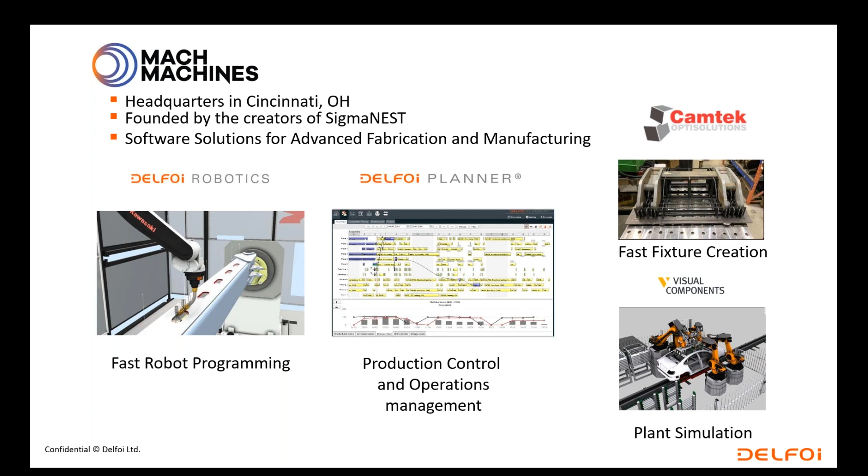They have the easiest to use, world's easiest welding software for robots, and they offer us the planner as well. They also have plant simulation and lean consulting conversations they can have, but they have the most experience in robotics, and you'll see that come out as we talk about our products and services.

Who is Delfoi? They have products for all of the robot applications, but the hardest one, the most challenging, is welding. We have solutions for cutting, finishing, polishing, and painting as well. We have customers that you've heard of, but all that means is there have been people that have recognized that Delfoi can help them do what they need to do. We support most major robot brands. I'm sure there's a couple out there we haven't done yet, but we would love to try.

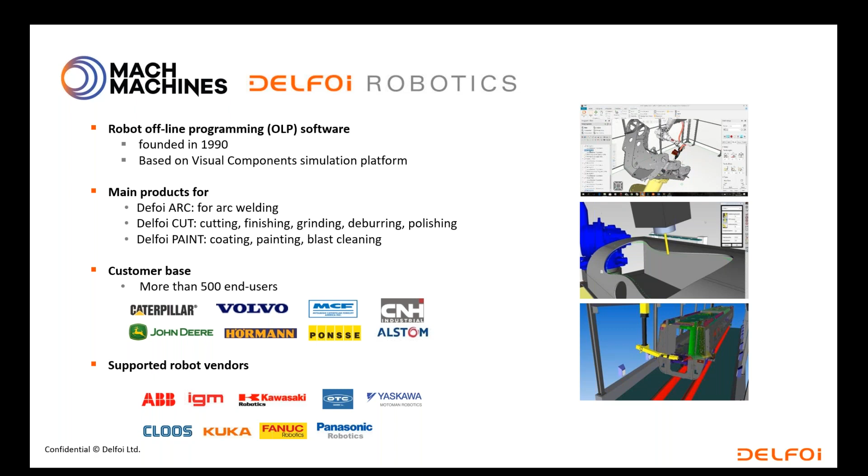Here are a couple questions that we typically ask. Are you still manually welding? And if so, are you hiring more welders? That is a challenge. There's a company here in Alabama that hires 9 welders to keep one. It takes them 6 months and costs $250,000 to get one welder to show up and pass a drug test on the shop floor. It is a challenge to hire more welders.

In addition to having them show up and be competent, robotic welding is a much faster solution. It should be a third or a half the time a manual welder can weld, because there are far fewer air moves. We can get more consistent quality, and robots are available more hours than a human welder can provide. But there are some barriers besides the known barriers of how big is your part.

Other barriers are ones that any robotic application, or any new CNC equipment, would have. The barriers typically come about 6 months after you get a robotic welding cell, and you ask two questions — that's the point of our webinar today. How do I program my robots faster, like my other CNC machines? Your lasers and mills are programmed very quickly, and you can get code out to the cell and press go. Also, how do I make my fixtures faster and cheaper if I'm putting more parts on my welding robot? Those are the questions we hope to answer today.

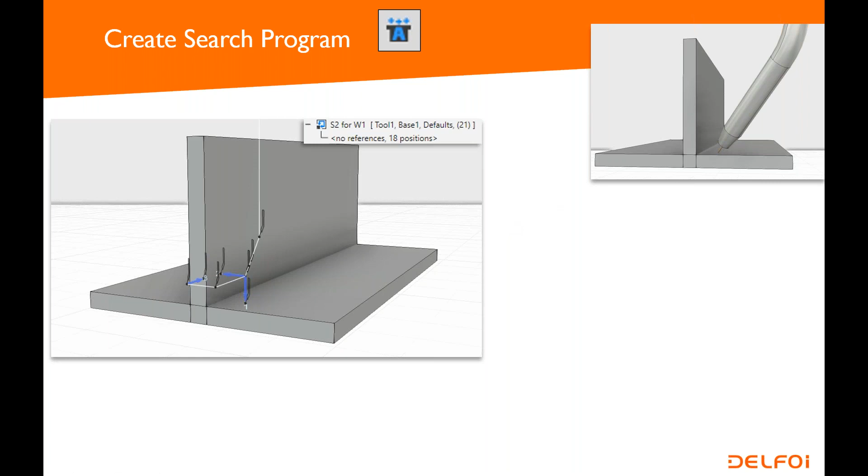The next step in the workflow would be to create a search program. With the search, you have the possibility to compensate for any deviations that might occur due to the position or shape of the workpiece. This is possible by doing either a manual search or auto search, but today we will look at the auto search option as I go through more in the presentation.

So once you have created the weld program, the search program, and your whole program is ready, the next step would be to validate the program. And to do so, we have the path check functionality. With this tool, you can check if there are any issues with respect to reachability, joint limits, singularity, or collisions.

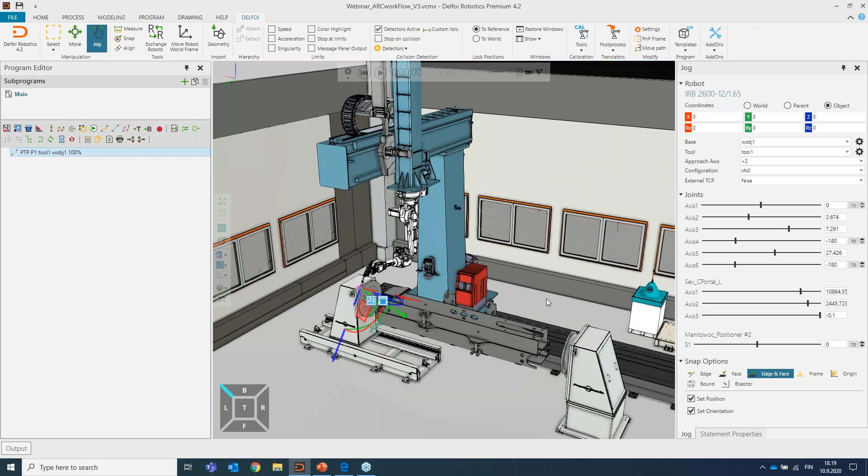So let's begin with the first step here, as we saw, to create the weld path. For this, we have here the create path tool. I click on this, and as I do so, I'm going to get this green picking surface. Now I go closer to where I want to create the weld.

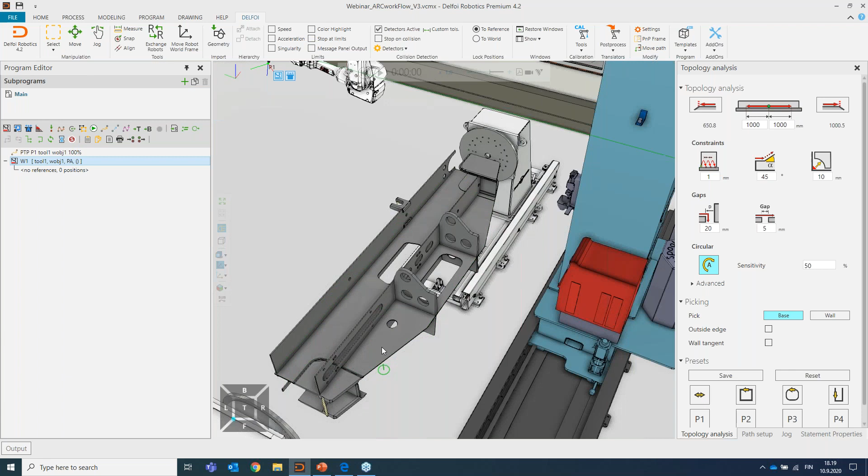Now let's say in this case, I want to create a weld on the seam over here. So I zoom in closer, point my mouse there, and let's see. This looks good, so I will left click the mouse button, and you can see that now the weld is generated. Also you can see that we have here the PA welding position. The software automatically calculates the welding table positions, and you're able to choose it from this window over here. Okay, so that looks good.

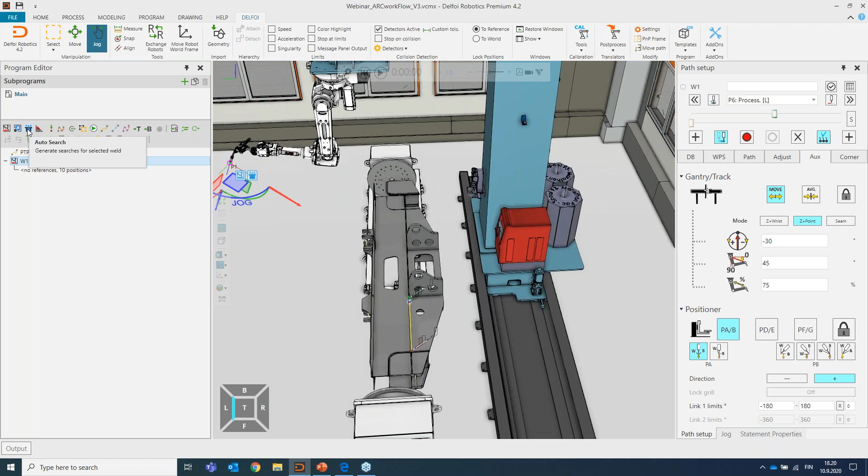Now, once the weld is done, the next step would be to create the search. As I said earlier, you can do a manual search, but in this case, let's see how to do the auto search. Auto search is basically going to automatically generate the search points for you for that particular weld. So now when I click on this weld, I click on the auto search option, and there you go. You can see that we have the search automatically generated by the program.

Let's zoom in a bit closer. And I click the search, and you can see that, okay, we have got a three-dimensional search at the beginning of the weld there.

Okay, good. Another thing is that this is an auto-generated search, but we do have the settings here for this auto search, so you can customize this based on your application. For instance, you can choose whatever your touch sensing type is, if it's a wire, or if you're doing the touch sense with a nozzle, or if you have an external device such as a laser or a camera.

And then of course you can also select that if you want to have a search just at the beginning or in the middle or at the end and so on. You can also change some other parameters, how the search is going to work based on your application.

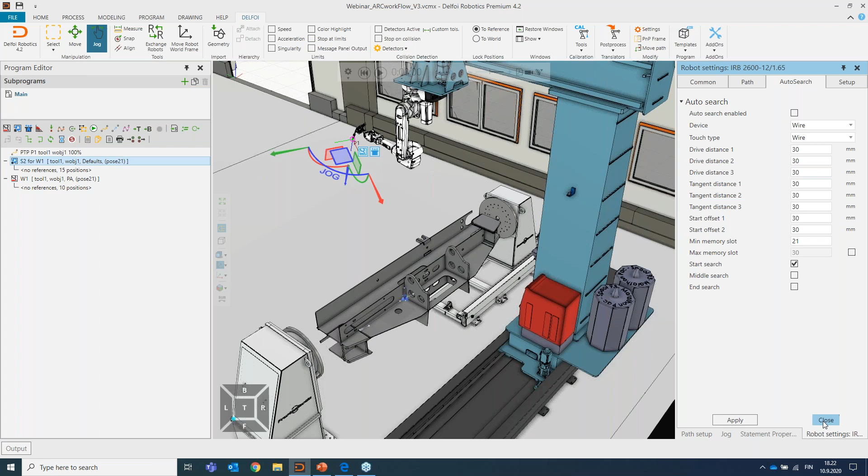Okay, so now that we have the search, weld, and let's say this part of the program is done, the next step in the workflow would be to validate the path. So let's go here and take this path check tool. I click here, and then I can check the whole program or a subroutine or selected statements. Let's check the whole program.

I click on check, and it does the check for the whole program. Then you can see that here we have got this timeline. Let's make it bigger. The program is 99% correct, and we have got some collision issues here.

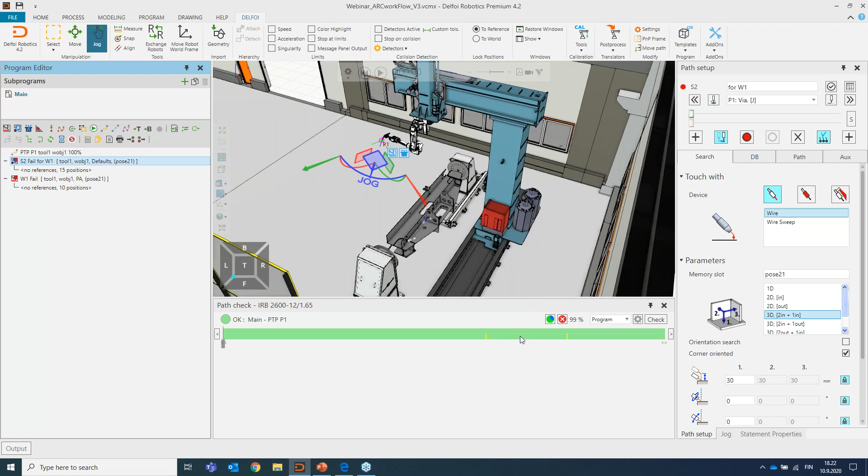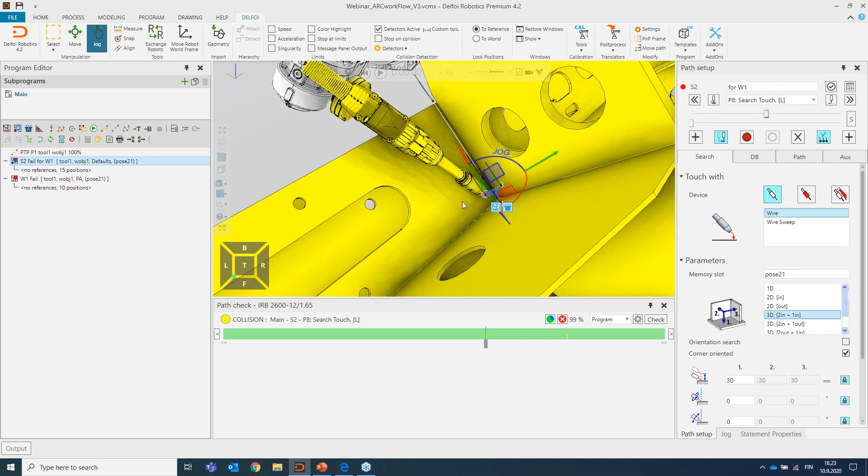So let's go and check those out. I'm going to make the detectors active so that we can see also in the 3D window. Okay, so let's see that the problem is at the search. I activate that, and this is the second point of the search, and there is some collision with the nozzle there. So we can quickly go here and unlock the second touch point, and let's try to get it away. That already looks a bit better.

Let's move on to the next problem point. So I go there. Okay, and let's double click to get the problem point on, and let's zoom in closer. You can see over here again, this is the beginning of the weld, and the nozzle is hitting a bit on the edge because there are walls at the beginning here.

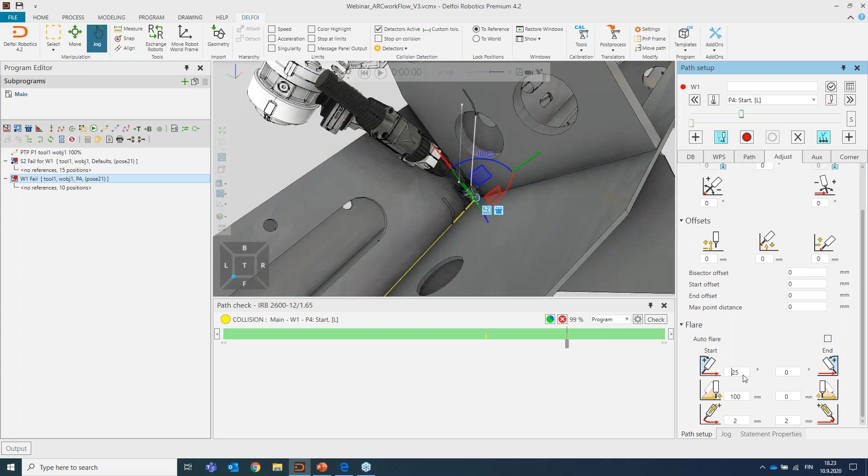So for this, we can try to use the flare option here. You have the flare at the beginning of the weld so that it does not collide with the wall. So that looks good, and let's check the program now.

Okay, there you go. Now you have a 100% correct program. You can also see the status here that it's green and the weld is okay. And what else I can do from this path check tool is...

I can jog this slider here, and you can see that the robot jogs through all the motion paths. This is basically the same way as doing the simulation, but it's quite handy as you can also go back and forth and check the robot motion.

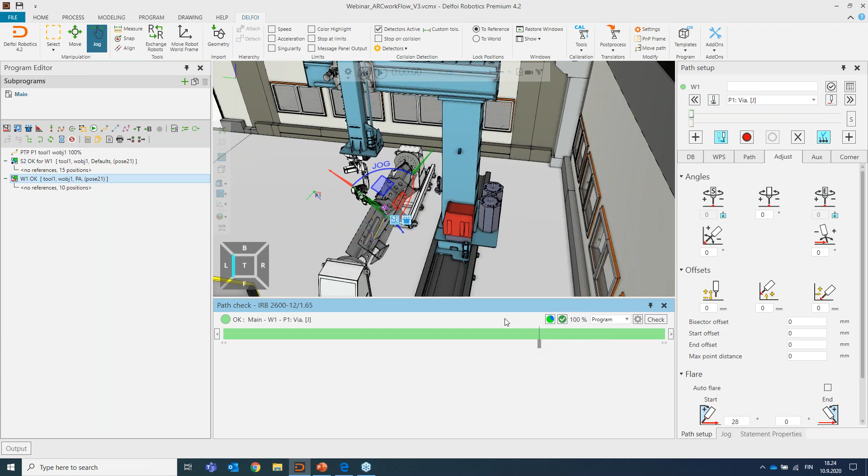Okay, that looks good. One more thing from here is you get the weld report tool. With this report tool, you get the total time of the process, the percentage of the welding time, the percentage of the via time, as well as the weld length.

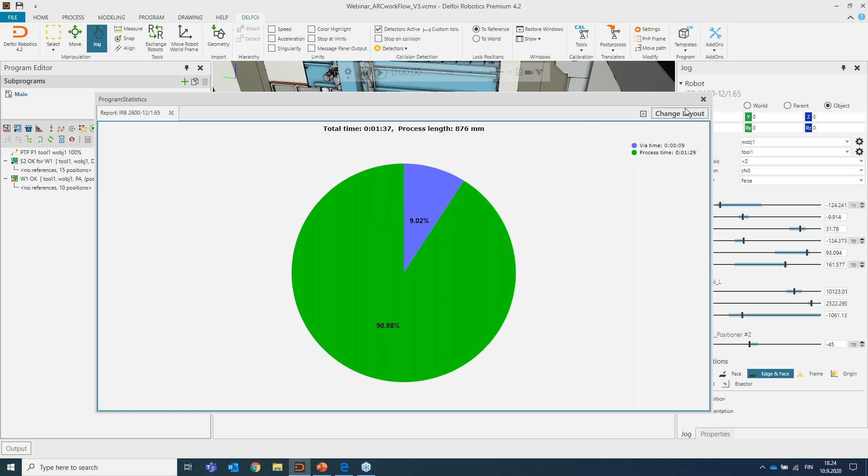Okay, so now the program is good. We have validated it, and the last and final step would be to download the program or post-process it. So we go here. We see that our robot is ABB, so we download the rapid file. Let's download that file.

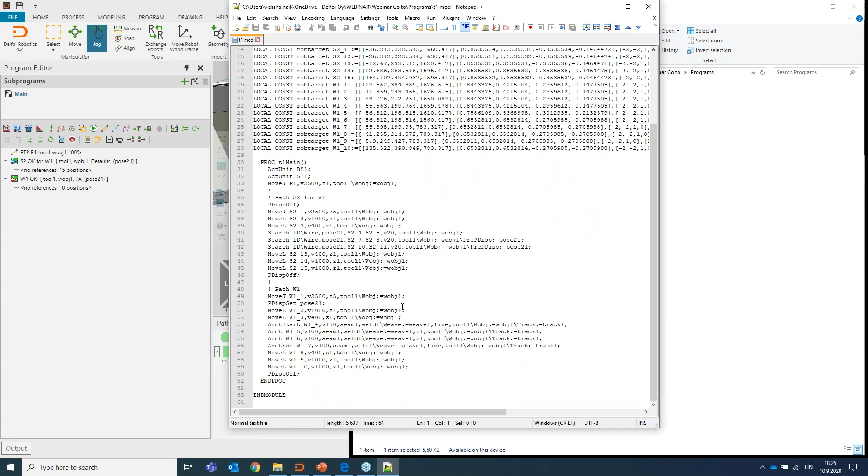Okay, let's see. I'm not going to go through the code, but just to show you that we have the program here ready, and that can be put onto the robot to weld.

Okay, but this was from my side, and I hope that you guys got an overall understanding of the basic workflow that we have here at Delfoi. Thank you for your attention.

Our next speaker here is going to get a little bit more nerdy in the software. We've shown you the basics, it's pretty easy to use, but let's talk about some advanced applications that we've worked on here. My friend Juha is the Senior Project Manager at Delfoi in Finland, and he's going to talk about features for fast programming, multi-robot systems, and jigless welding - some advanced applications, maybe unlocking the potential for integrators or robotics representatives and customers who don't want the limitation for your configuration to just be hardware. We want you to be able to do anything that you'd like to do.

Anthony, can you see the software screen as well? Very good, looks great. Can you move it around? Yeah, I hope so. Looks great. Okay, so let's start.

I have this 3-axis gantry layout where I have a 6-axis robot, a positioner, and a 1-axis workpiece positioner. On the right-hand side, with this workpiece, I'm going to show some examples of how you can use cloning and mirroring tools, which will make your programming pretty fast.

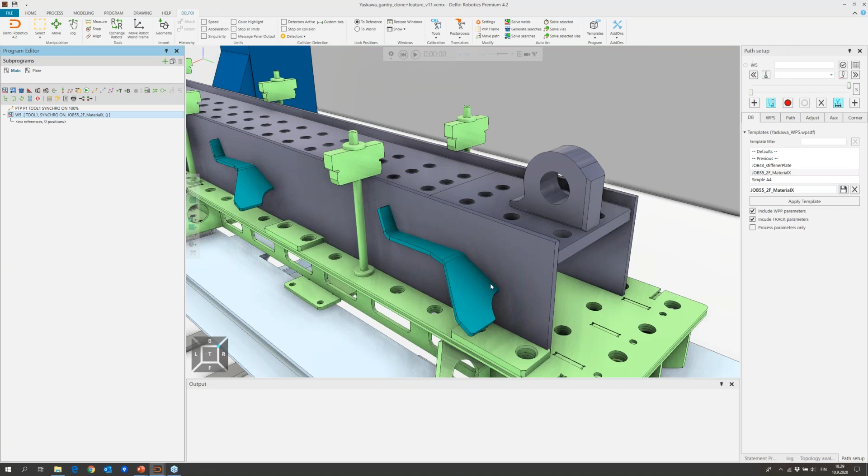First of all, I need to create one weld path over here. Let's put it over there. So I have a little bit straight, a little bit curved weld in this weld path. This is the one-click programming magic.

Let's go on with the cloning tool. So I will select this one weld over here, and then I will be using our cloning tools.

On the right-hand side, you can see the user interface where we have quite a lot of different options that you can use. In this case, I'm going to use so-called vector clone, so I can pick a couple surfaces from the first and second feature, and then with my mouse scroll, I can add the number of how many clones I want to create.

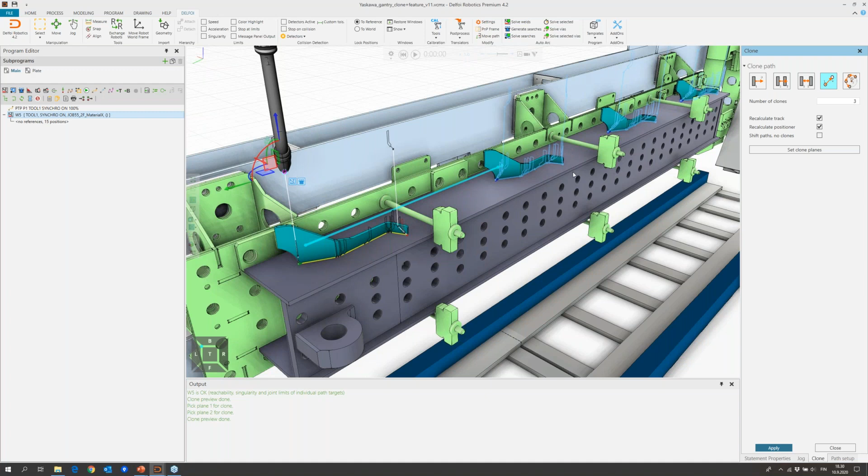You can see in this blue color a preview of what you are going to have. And if this looks good, I will hit apply, and the software will do the clones for us. Once again, when you use this cloning tool, you can see that the robot positioner is calculated automatically so that you can reach the weld every time. So that is a linear clone.

We have the symmetric workpiece over here, so the next thing I'm going to do is mirror these 4 welds on the other side of this workpiece. I will use mirror clone. Let's zoom in a little closer. I can select the plane, so from this surface I will start, this is my second surface, and apply. Now you can see that we have all the welds on the other side as well.

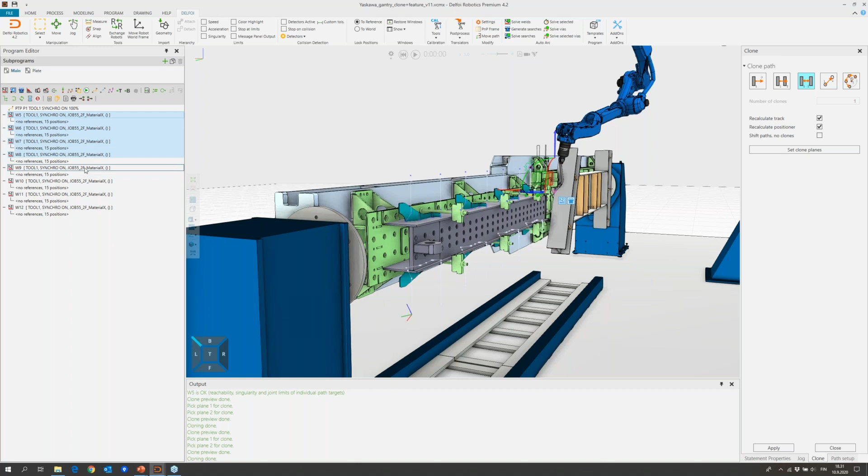If I select one of these welds that we just mirrored, you can once again see that the software calculated all the external axes automatically based on my selections that I had inside this weld. So I had selected face down position.

Okay, so that's cloning and mirroring. Of course, there are lots of different options over here, but this is the baseline what we have.

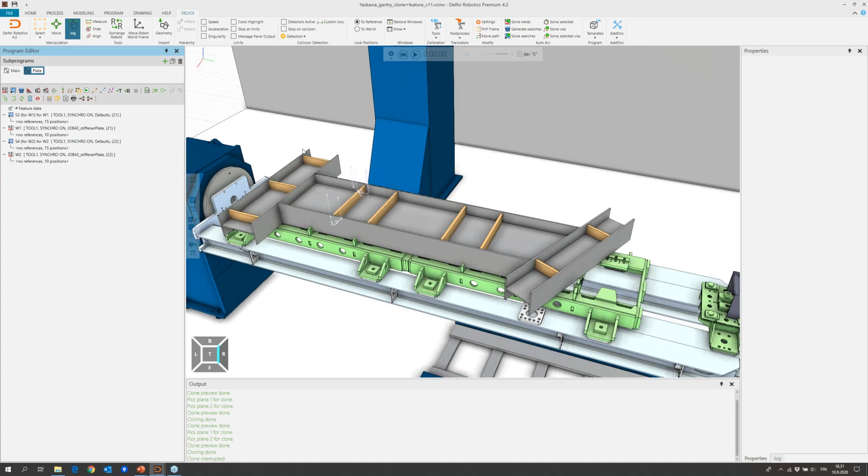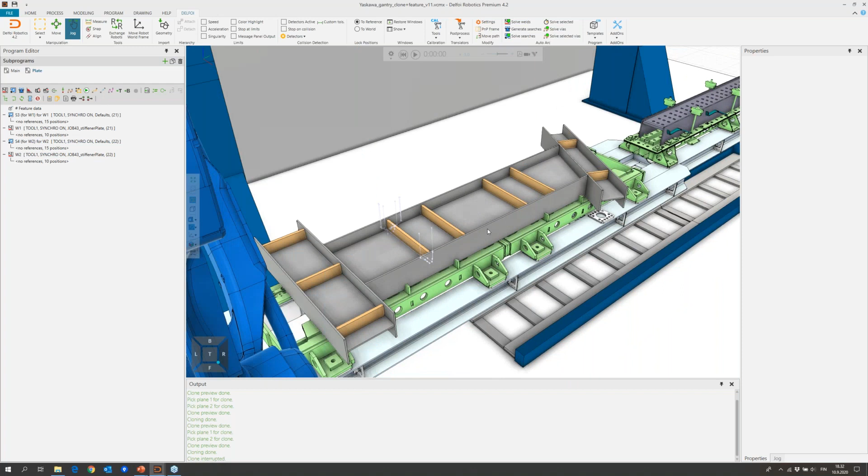The second thing I'm going to show with this workpiece is our feature template concept for really fast programming. What it really means is that you can design how you want to weld this or some part in your assembly. In this case, we have this quite simple construction part in this layout.

I have already programmed a couple of searches and a couple of welds for this one plate that I have in this assembly. So we have a start point search for this first weld, and a start point search and the other weld on the other side. So this is how I want to program this kind of parts.

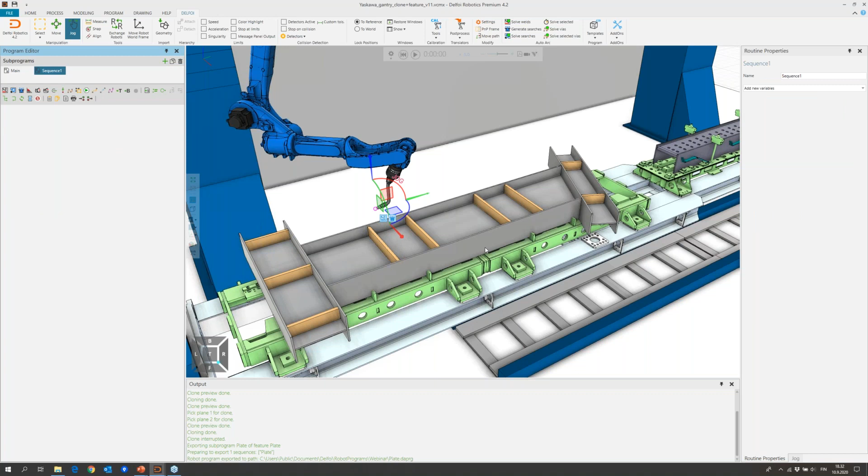Well, let's save this template. Program, export template. We will save it to the software database. So there it is. I can actually delete this one, and maybe I will just create a new sequence. So we have that defined how to weld this kind of part.

In this assembly, we have similar parts over here. We have a kind of similar part, which is just a little bit shorter. It's in a little bit different orientation also over here. So what we can do is import template. Let's see, I want to generate this program in sequence 1 that I just created over there.

Well, because we have different size of parts, I will let this software scale the welds in case there is a different size of part. And then I will say, okay, import immediately auto select template.

So in my database, I could have like 100 different designs for different kinds of geometrical features. And the software is capable of selecting the correct template based on the CAD structure tree of this assembly.

So in this case, what I'm going to do is just pick the component, wait for a few seconds. When the software does the work, maybe I can drink a little bit of coffee, and then it's done.

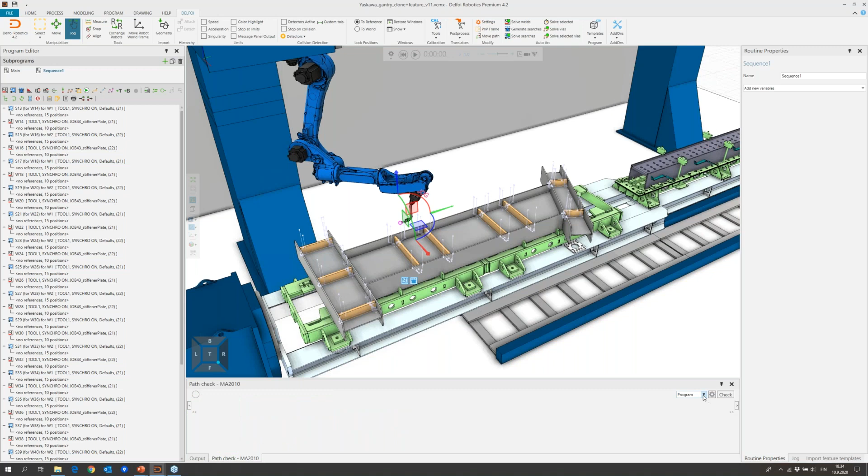And of course, after this, I can use this path check tool that Vidisha already showed you to verify if this program really works. Let's see, it's checking some collisions and going through all the points to see if we have any problems with joint limits or something like that.

I'm drinking some coffee over here. And yeah, we're done. So everything is good, 100%.

Looks great. So then I can just quickly watch through the program. I'm not running any simulation, I'm just sliding this back and forth with this path check tool that we have. And we would be ready to download the program. Of course, you can resequence this thing over there, and we will have some automatic sequencing tools in our releases.

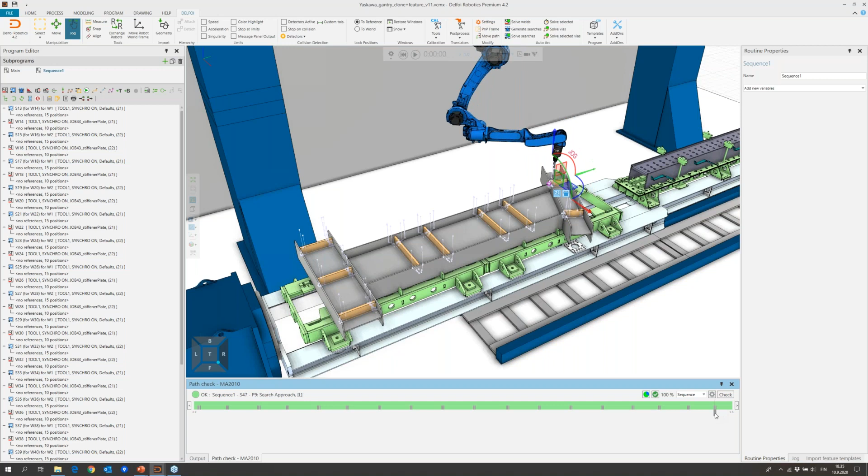And by the way, if someone is thinking what is this gray part over here in the path check, it means that because in this case we are using a nozzle, we are using touch sensing with the nozzle, and of course the nozzle will hit the part. So we are leaving a couple millimeters unchecked before and after that touch point. That's why you see these gray colors up here.

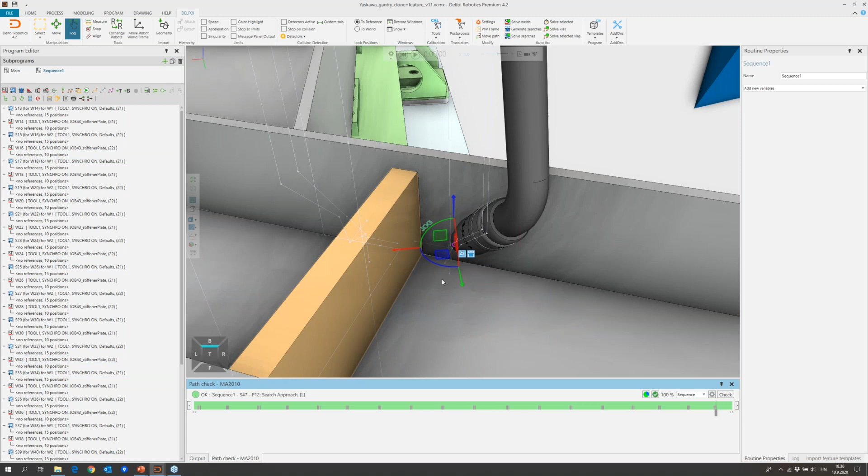So that is how the feature template works. Actually, I can show another example, doing it a little bit different, because before I was using this component option over here, which basically creates the sequence based on the part structure inside this assembly.

So in this situation, if you now want to select the welding order, you can use the pick feature. If you want to weld from inside out, for example, you can choose that one first, then that one. This is a little bit more manual, but basically you are just showing what is going to be your welding order for these parts.

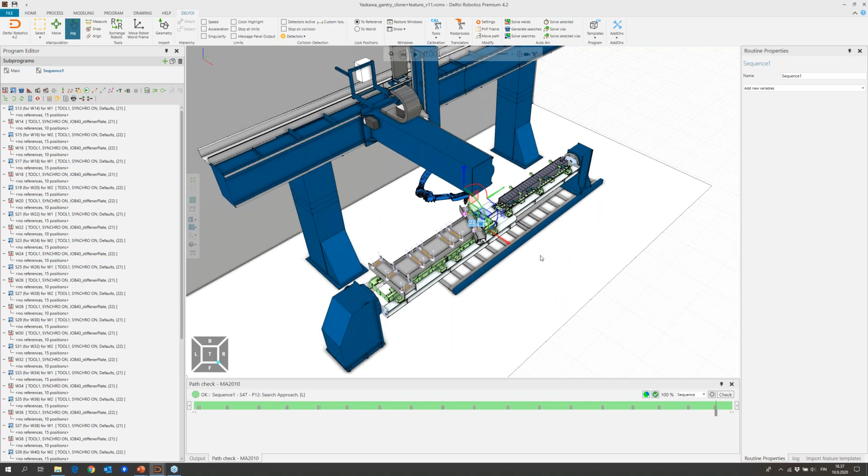Yep, and we're done again. Great, so that's about feature templates. Of course, there are lots of details behind this, and we can talk about this later if you want to create another demonstration in the future. So that is cloning and feature template.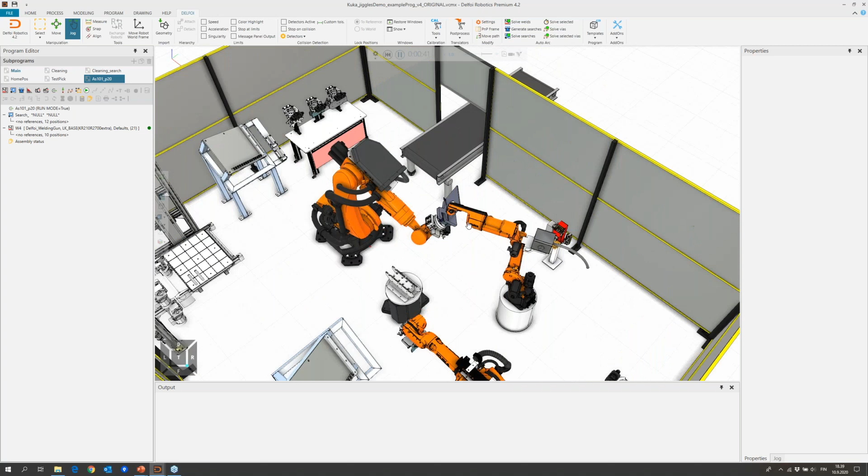Then our robot is going to do some tack welding over there, and then it would continue with final welding. So we are doing some touch sensing, and we are doing some welding like that. So we have here part handling operations, assembly operations, and welding operations.

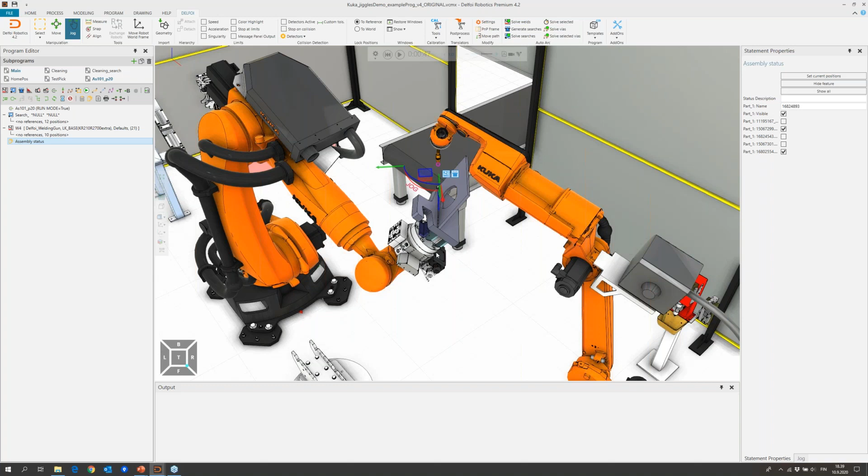One nice feature in our software is that we support this concept where you have a robot as a positioner. Of course, you can do this with many softwares, but the special thing in our software is that we can program this as easily as you would program a one- or two-axis simple positioner. Let's try to see how it looks.

So if I create a new weld path, I will say that, okay, we have a master-slave situation over here. Let's see, synchronized path. The rest is like what you have seen before. You just pick your mouse, okay, that looks like something I want to weld. One click and you have your weld path.

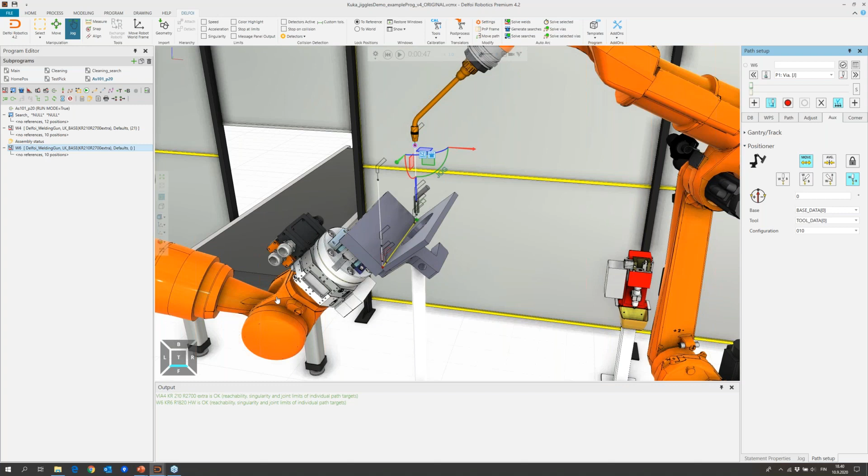What really separates us from some of our competitors is that we have very simple control tools to control this positioner robot. So I can select from here if you want to weld in flat, in base down, or down position. You just need to click this one button.

Also, you can choose if you want to let this assembly robot move during the welding, or keep it still and let the welding robot do all the movements. You can also change some other orientations like this, mostly for reachability issues or something like that. Just scrolling your mouse, clicking these buttons to select the position for these three robots.

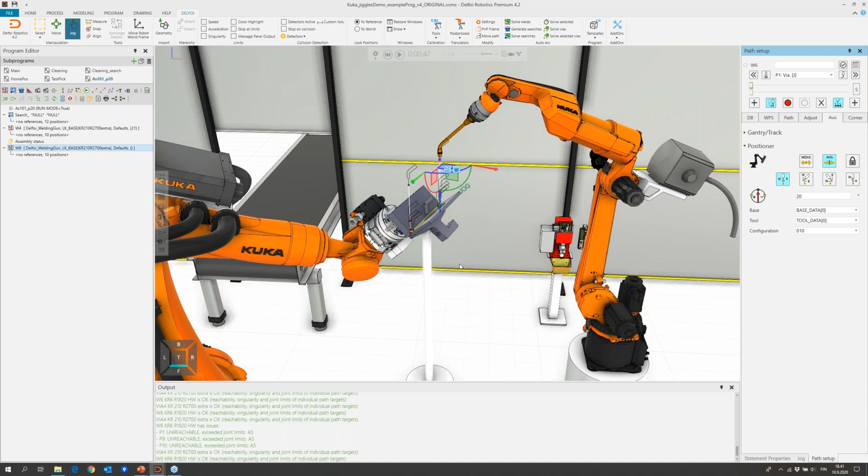That is what I wanted to show about these multi-robot systems. If I go back a little to this PowerPoint presentation on the right-hand side, you can see once again these different scenarios that we support. You might have two robots working on one workpiece positioner, fully coordinated, or maybe just a robot as workpiece positioner, or sequence welding layouts. So we have all the areas supported.

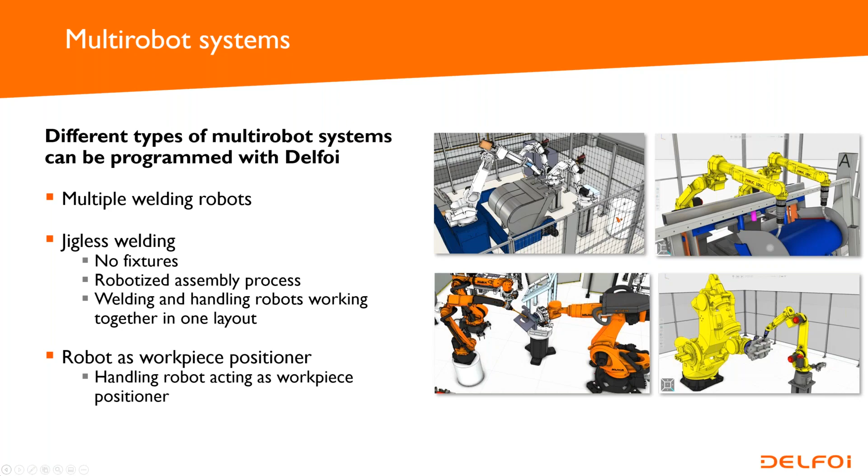Thank you, Juha. There's a couple questions that came in, are you game to answer a couple of them right here in the middle of our presentation? Yeah, should be. So you showed that the track X, Y, and Z axis were generated automatically. Yep, exactly. Okay, so we have this, let's go over here, for example, to this first part that we have.

So the axes are generated automatically, yes.

On the right-hand side, in our auxiliary axis tab, there are some control parameters you can change. Just by scrolling your mouse, you can see if you want to change this control parameter, and then you will get a slightly different result.

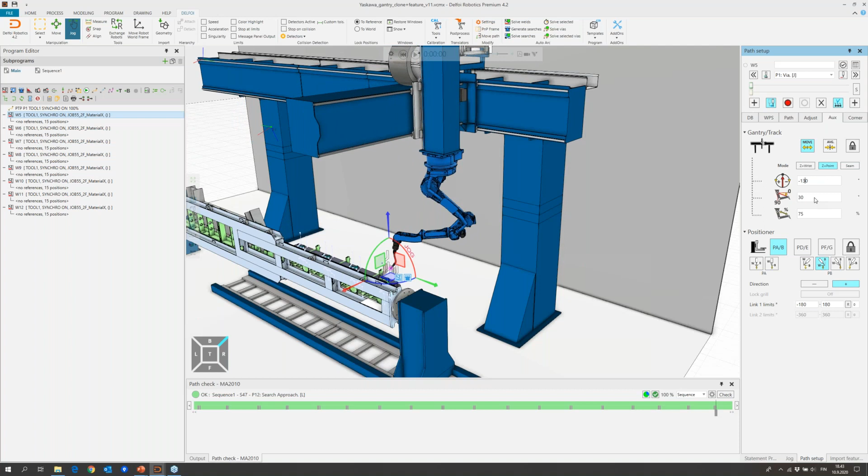Because for this robot positioner, there is almost an unlimited amount of different configurations or solutions available.

to reach this one point. Okay, thank you. I hope that answered that question.

Someone asked, can we adjust the paths between the clones while the robot is traveling between them without welding? The arm moves - can we adjust those paths, the via points?

Yeah, so basically the default is that we automatically program approach and departure points for the welds. So that was the first weld, that was the second, and the points in between are just for moving from the last point to the first point.

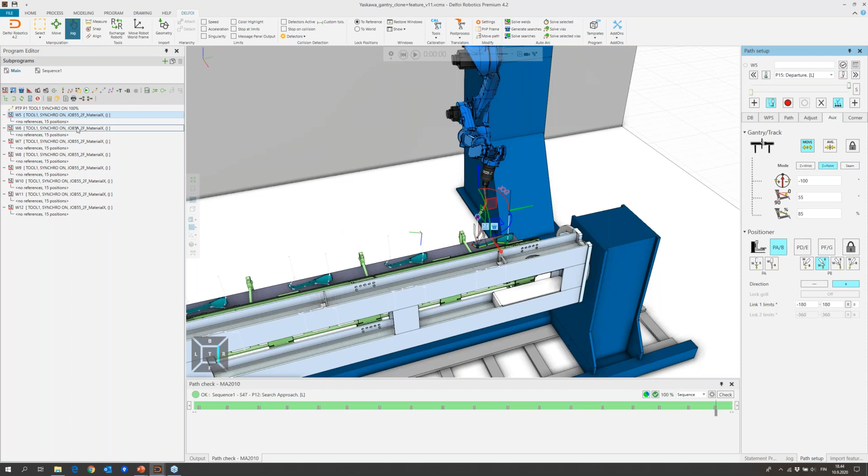And of course, if you want to add or remove points in between manually, you can do that - everything is supported. First of all, in our path tab, we have a parametric way where you can change the

location of these points. You can remove them, you can get them back, or you can just pick this handle and move your robot wherever you want. You can touch up that point, or you can add another point

manually. In the later release, this year when we release our new AutoArc package, there will be a possibility to solve via paths between welds automatically with the software - and we can talk about that a bit more.

If there's a clamp in the way, you certainly want to make sure there are no collisions, and there are some tools that make that very easy for us to do.

One more question here, then we'll move to the next section. Is there a geometry limit for using the weld template? Is there a constraint in terms of the shape of the part?

Not really, but to use the feature template concept, you need to have your CAD structure good - how would I say it - you need to have your CAD structure well organized.

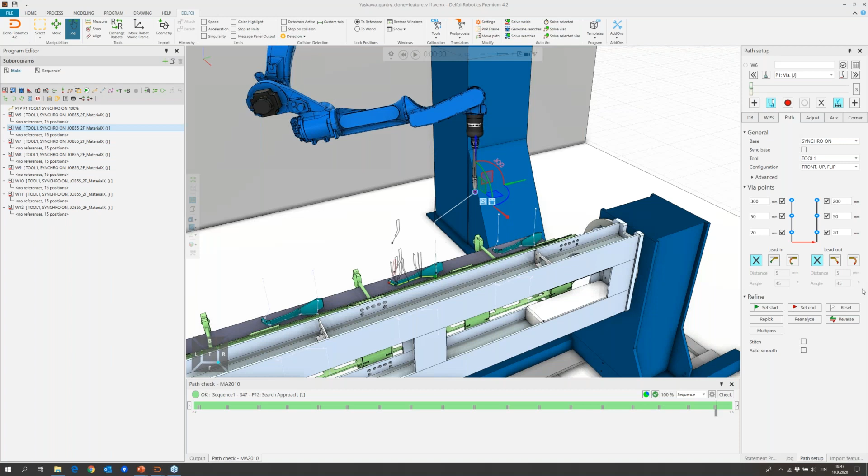Okay, hello everybody. This is Vesa from the R&D team of Delfoi Robotics. I hope you can hear me and see my screen already. I cannot see - are you sharing your screen?

Yes, on my end it says that people can see your screen. Okay, great, can you see it? I can see it. Okay, great, go ahead. Very good - I hope everybody else can see it also. Just send some chat text to the chat window if you don't.

Okay, so first I'm going to share some light of what else you can do with robotics, Delfoi Robotics applications, other than only arc welding that we have been talking about so far in this webinar. So basically we have quite many applications. Each application is, the purpose of each application is for a different process. And Delfoi Arc, what we have been now discovering in this webinar, it's not only for arc welding.

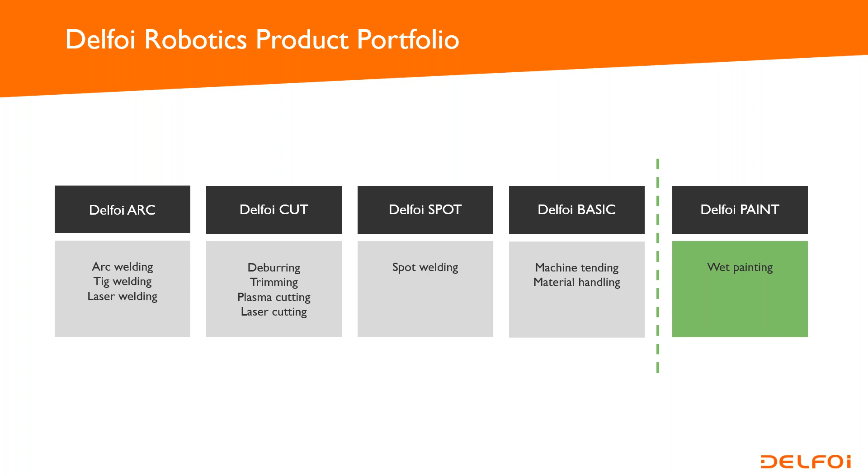And then on the right hand side, Delfoi Paint, which is targeted for wet painting, and it's behind the line because it's not officially released yet to any customers, but it's in test use on some projects, just to get some feedback before we are brave enough to officially release it. But it should be Q4 this year when the release date is.

So let's check what all these applications are that we have. I'll just run through these slides and videos quite quickly because we are a little bit limited in time.

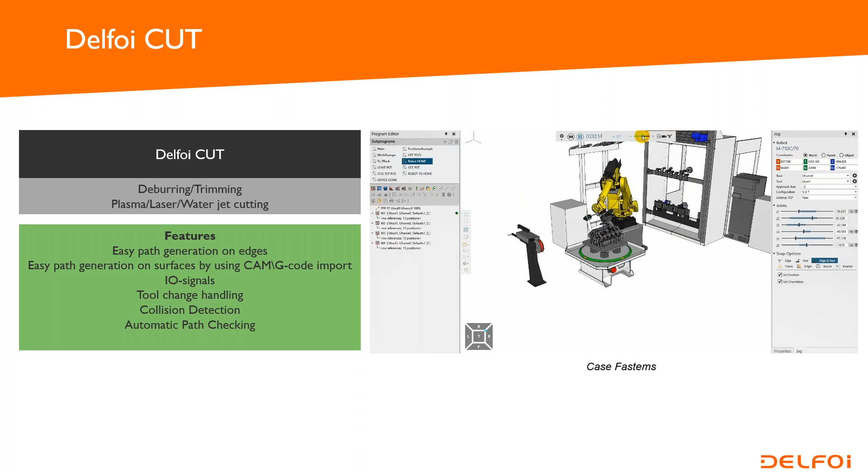On top of this automatic detection of the edges, we have added a new functionality: if you want to, for example, polish the surfaces, you can import CAM APT files from CAM systems, and also G-codes, depending on what you need, because those other softwares are made for surface detection and they make really nice paths on the surface. So we are not trying to reinvent the wheel - that's why it's easier to import the paths on the surfaces from CAM softwares, and here we concentrate on edge processes.

And then Delfoi Spot. This is also a very new software or application, and in this software you can create spot welds manually just by picking with the mouse where the location of your spot point is, and you can easily modify it like in other applications. But you can also solve the point automatically, so you don't have to modify it. The software can automatically find out which is the perfect and working orientation for your gun or spot gun, so that you're avoiding collisions and other problems your robot can have, like reachability or singularities.

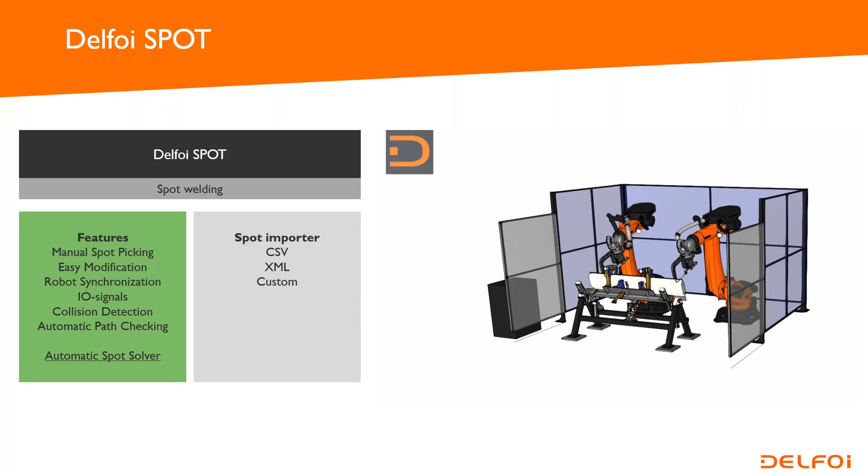But if we move on to the spot importer - many customers are saying to us that you cannot just pick any point from your part to create the spot points. That's why we created the possibility to import the spot coordinates, because typically you are some subcontractor, and for example in the automotive industry, they define in FEM softwares where they need the spots to be, and they can deliver that information in many formats. At the moment we have a spot importer which is customizable in CSV, XML, and then also a pure custom format can be used, as a service based from us.

Here you can see a short video where we import a CSV file that holds a few spots on this specific workpiece. In that CSV file, it can already define the coordinates, but also which robot this point goes to, which configuration of the robot you need to use, and so on.

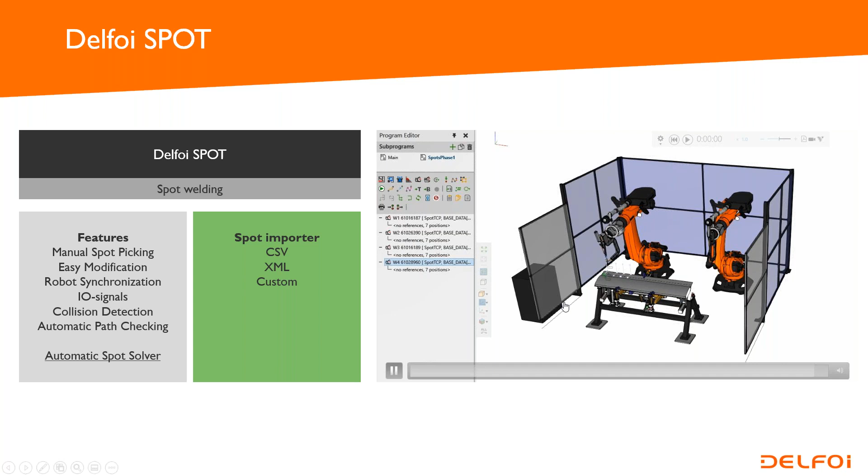And then Delfoi Paint. This is meant for wet painting, and we have now been developing this for quite a few months. We are able to create the paint result, but also paint thickness results, and we can calculate the accumulation of the paint. So if you run the same path twice, you get thicker paint, of course.

We can say that in that area at the moment, we are the fastest in the world, but we have been testing so far, benchmarking against other software.

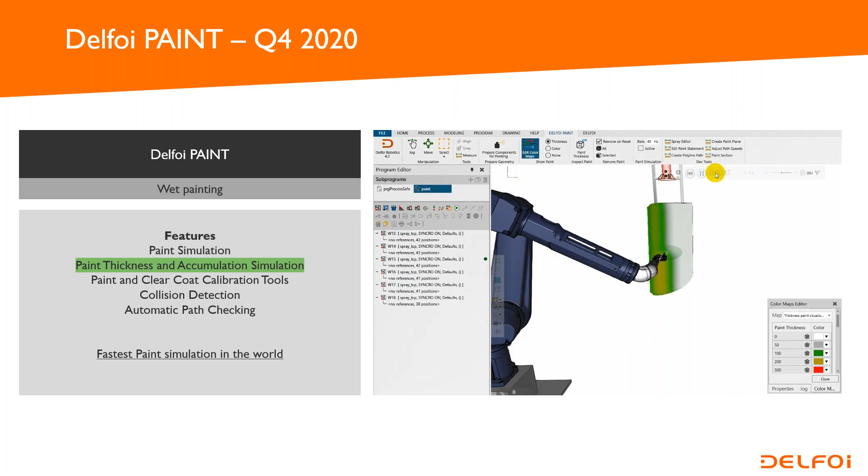Now on the right hand side, you can see a short video doing some zig-zag motion on the part. It's not only painting the color of the paint, but you can see the thickness of the paint. There's a different color for different thicknesses, so you can define any color - for example, in this case green or yellow could be the target color - and you can change your motions and paths based on that to get homogenized results.

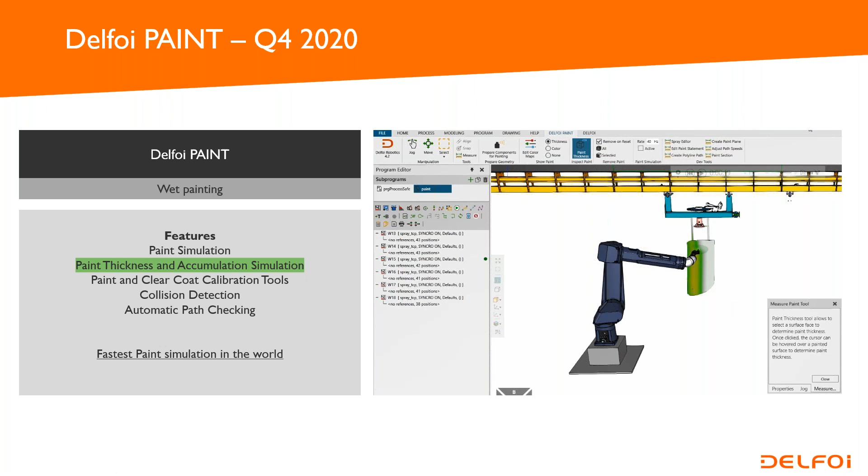But what is actually the most difficult thing in paint is how to calibrate your simulation layout, or paint simulation, to match reality. For that, we have created our own calibration tools. You can see here that it's quite a complex window - lots of parameters, and that's how it is in painting. It's not an easy process.

Here you will see that just by importing test data from the real robot, we are adding a new paint brush basically to the robot. So we measure a couple of strokes on the real robot, we measure the thickness at different heights, different speeds, and we import that as a CSV file. Then we have an algorithm that fits the simulation world to match the measurements, and it automatically creates this kind of paintbrush into the simulation world.

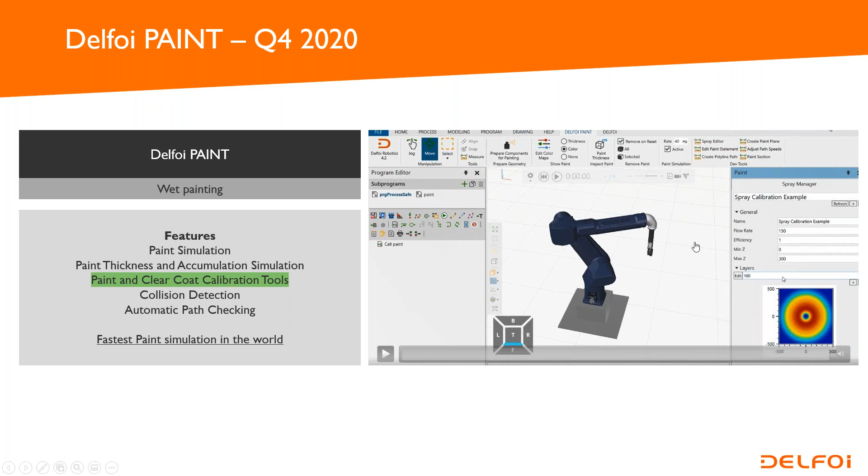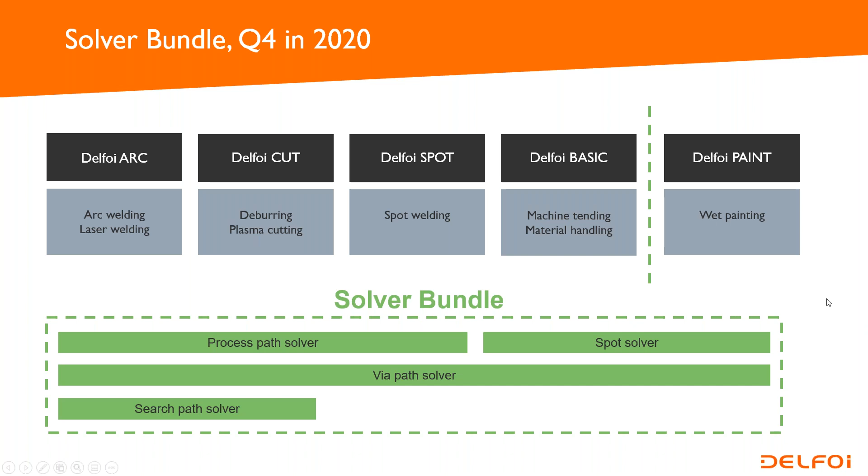So what else will be there later this year? There will be a solver bundle for each of these applications we showed so far. So solver bundle, what is that? Let's talk about it a bit more. It's a set of tools to automatically solve all the problems you might have in the robot's path - there can be reachability, joint limit, singularity, collisions, even auxiliary axes can fail.

As you saw in Vidisha's presentation, she was doing manual modifications to the parameters to fix these issues. But our target is to have a set of tools to automatically solve these problems to make the customer's life easier.

For example, here you can see how we see it in Delfoi Arc, in the arc welding process. The solver bundle basically gives you tools to solve the weld path automatically. It can also give you a via path automatically - how to access from the previous path to the next path without collisions. But then we have to be able to solve search paths for touch routines or laser scanning routines. If all three of those are solved, then we are able to give you a full automatic solution. That's the solver bundle, a set of tools to give you a full solution.

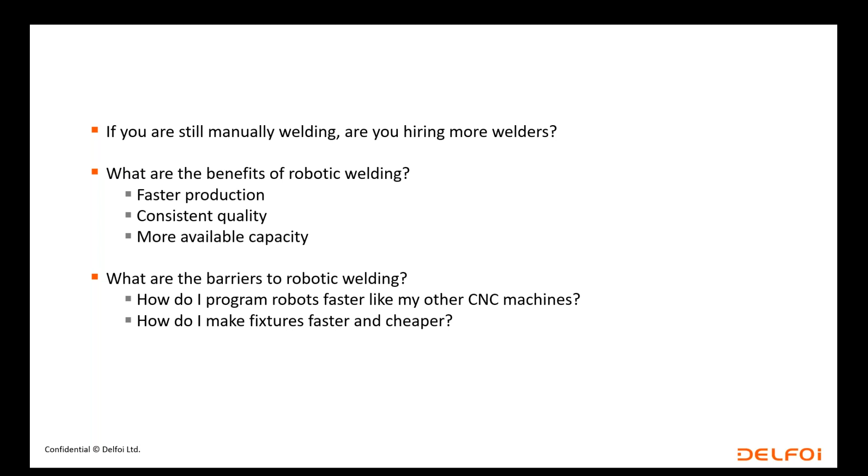I wanted to take a poll earlier - what kinds of things are you guys investing in this year? Is it paint? Is it cutting? Is it deburring? What is the next robotic application? Are you planning on expanding your welding process there? We just want to give you the tools that you can use to do what you want to do next. So now that's the big question that we help answer.

After figuring out how to program easier, the next question is how do I fixture my parts and hold them well, and how do I get this installed? One of the biggest differences between us and other robot software is that we spend the most time and care on the commissioning project. We make sure the cell is measured, calibrated, and put in the virtual environment perfectly so you can accurately send your code out to the machine.

And for that, we have Severi. He's going to talk about our brand new remote commissioning solution. We've had to do this as a constraint of COVID, but it's actually been working very well. You don't have to pay for plane tickets for us to come down; it works out quite well for us to do this remotely. So I'm going to transition to Severi now to talk about that tool and checklist we go through.

Okay, first of all, can you hear my voice and can you see my screen? Yes, very good. Okay, perfect, thank you.

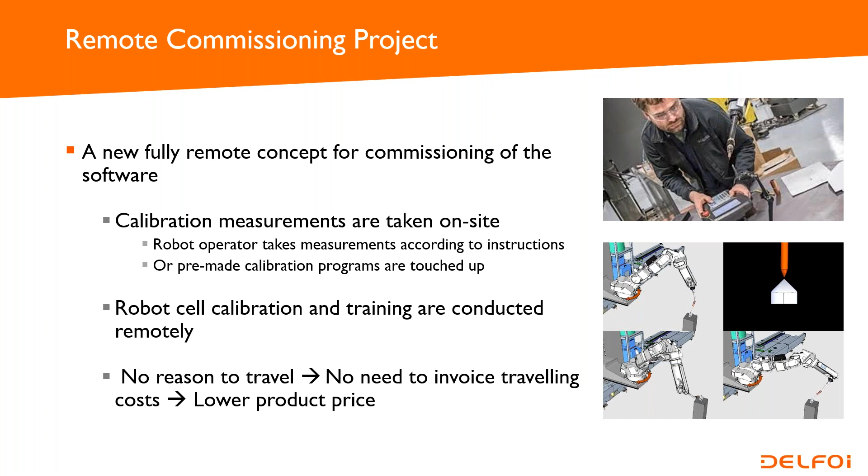So now we're going to take a quick look at the remote commissioning workflow. It consists of 5 steps. First, a kickoff meeting is held to determine the steps and responsibilities for the project. In this meeting, all calibration steps are gone through and the operator is instructed with the help of the new learning platform, covering how to do the measurements and what needs to be done. Second, the measurements are taken by the operator, or optionally an existing measurement program is touched up on the robot station.

These measurements are then sent back to us, and we calibrate the layout and send back programs for accuracy validation. After validation is successful, user training is conducted with the help of the calibrated layout. Lastly, all steps and their success are reviewed in a final wrap-up meeting to confirm that everything works as it should.

Pilot projects conducted during the pandemic travel restrictions show good results. There are many successful project deliveries with positive feedback from customers, mostly regarding the flexibility and capability to deliver the project during these times. Request for remote commissioning has been high, as almost all projects during these times have been conducted remotely, and there is still uncertainty regarding the future of traveling and a second wave of COVID-19.

You have information on how to perform the calibrations, how to perform layout calibrations on the software side if you're interested in commissioning layouts yourself. You also have access to different troubleshoot sections, giving information on what you need to do in different situations where you might have problems during the process. You also have calibration exercises and up-to-date Delfoi manuals.

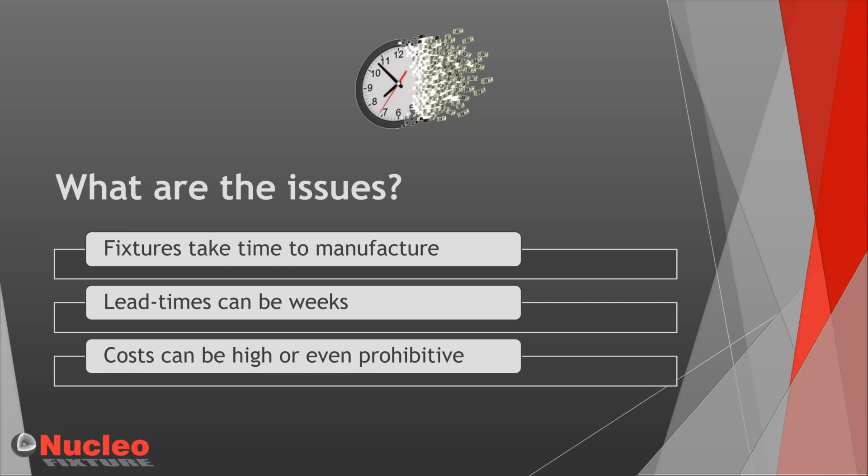So let me go to the next slide. What are the issues? Well, they take time to manufacture. It can take weeks. Costs can be high and sometimes outweigh the benefit of short-run parts, especially for a job shop.

So how do we reduce the time to make fixtures? How do we reduce the time? How do we maximize the welding output? Well, we call it the welding trifecta, and it's basically, as it suggests, a three-step solution.

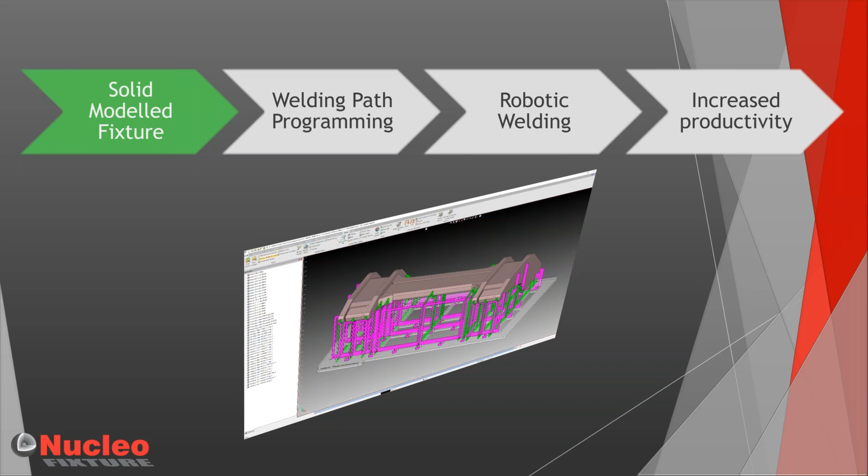The first step is to produce a solid model of the fixture that we need to hold the part. You can do this in your CAD system. Step 2 is eliminate pendant teaching and use the fixture and a solid model of the part to program the robot offline, so you have more time welding and less time teaching. Obviously, step 3 is to produce the parts reliably and quickly on the robot.

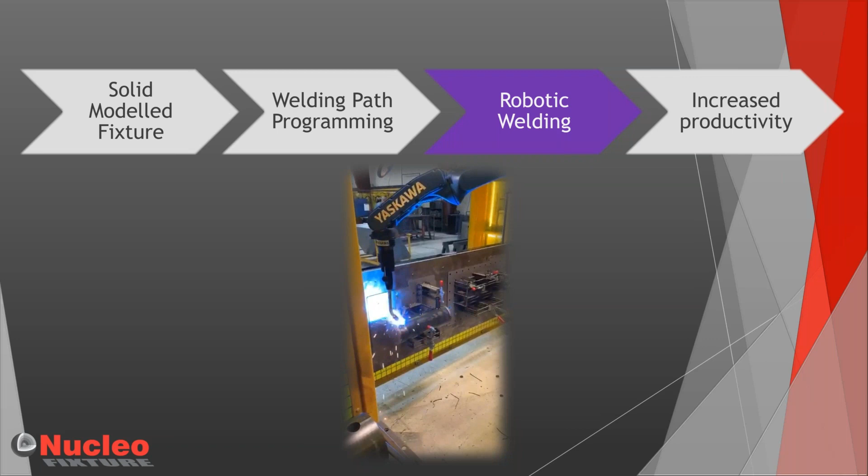So Nucleo is our solution to basically make this quicker, increase speed and reduce costs. We create these egg-crate type fixtures in minutes versus hours. It works out all the intersections and trims and annotates each part of the fixture so you can put it together easily.

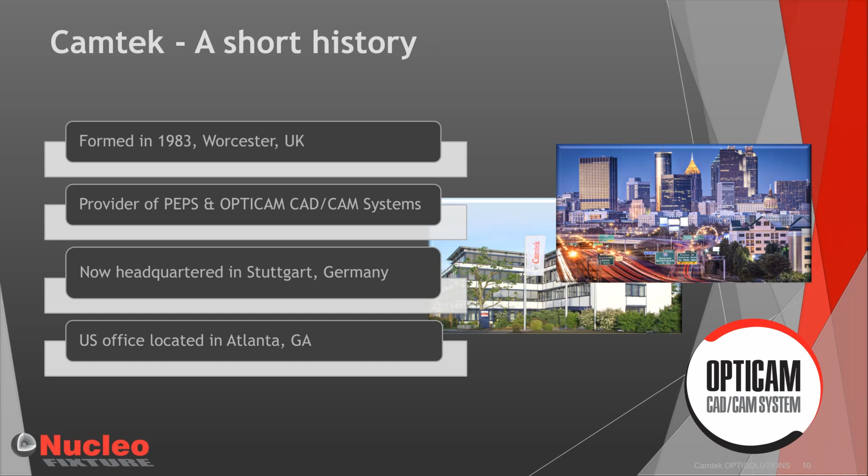So just a quick bit of information about us. Camtek was formed in 1983 in Worcester, UK, where I'm from originally. The headquarters are now in Stuttgart, Germany, and our office is in Atlanta, Georgia, where I'm located. We do the development of Nucleo right here in the States, and I'm one of the lead developers on it.

We just go through the steps to get an initial fixture created. We skipped a few steps for speed, but we're showing you the most important pertinent pages. So our first step is we import the CAD model and we orient the part. We get it located above our datum point, get it nicely aligned up. So if it comes in at a compound angle, we can get it squared up.

Second step, we set the material thickness for the fixture. So we can set, we can say use 11 gauge or 7 gauge. We can make the base plate thicker, etc., if we need to.

Next, we define the base plate. How big is it? Also we can define or import the CAD model of the table you're using, so you might have a trunnion or something on your robotic cell. Here we set the Z upper height shape for the fixture, so we can control the Z height of the fixture so it follows the flowing shape of this part. It's not just a flat top fixture.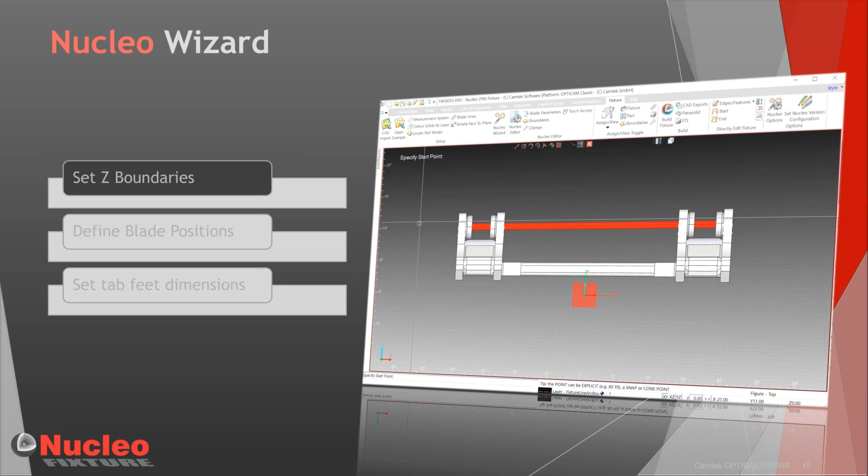On this page, we define the positions of the blades that are going to encapsulate the part. You basically lay out this grid of lines, and you can shrink them, stretch them, or draw your own. This is a process you spend a little time on, just getting the positions where you want to hold your part.

We next define the tab feet that marry the blades to the base plate. There'll be like an interlocking tab that matches the base plate pattern, so you define those parameters.

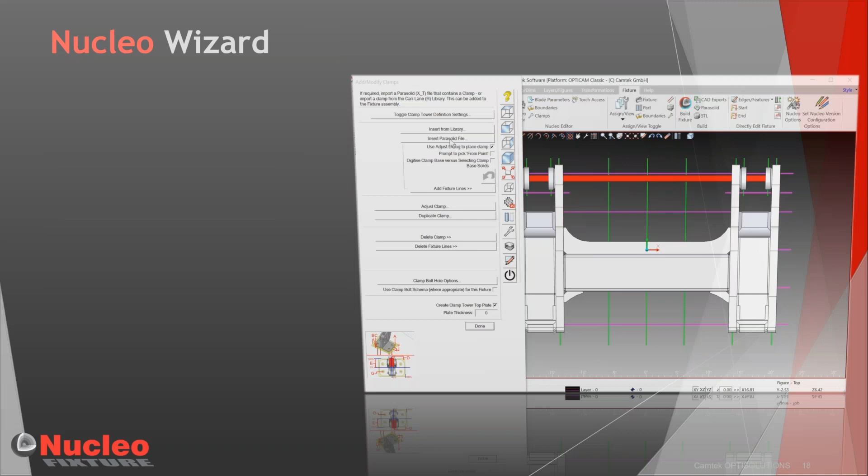We can insert CAD models of your favorite Destaco or Carr Lane, or some other model you've designed, like a pneumatic clamp. You can place that on the model and it will create a tower onto which that clamp is located. You repeat that wherever you need them.

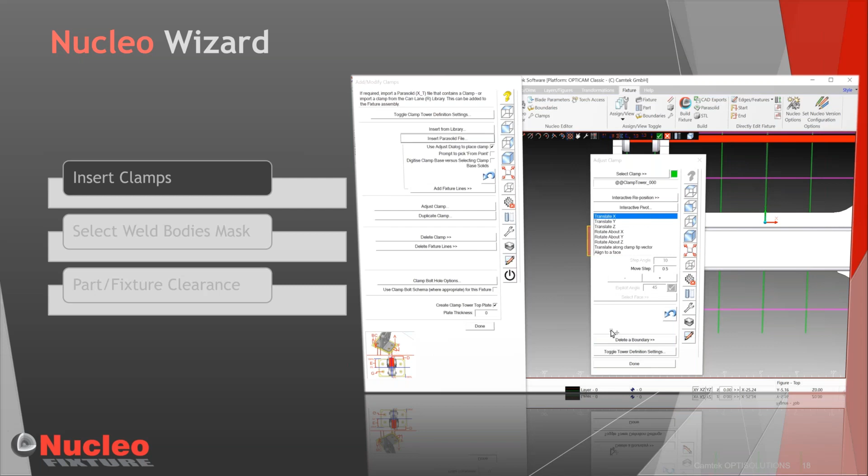We can optionally select a weld body mask. If you have the welds drawn in the model, we can select it and it will look for those welds and warn you if you're going to weld the parts to the fixture. We haven't got any in this example, but I've just picked one of the component parts for example's sake. At the end, it will color the blades orange because it thinks it's going to weld the part to the fixture, but clearly there's none in here. They're useful downstream for Delfoi though. If you do draw the welds in the solid model, they can be picked up for the programming process also.

On this page, we set the offset between the part and the fixture, or we can use what we call gripper points. They're basically bumps put on the edge of the blade every inch or half inch, and they allow you to adjust the fixture on the shop floor. You can grind them down if there's some error between the physical part and the model.

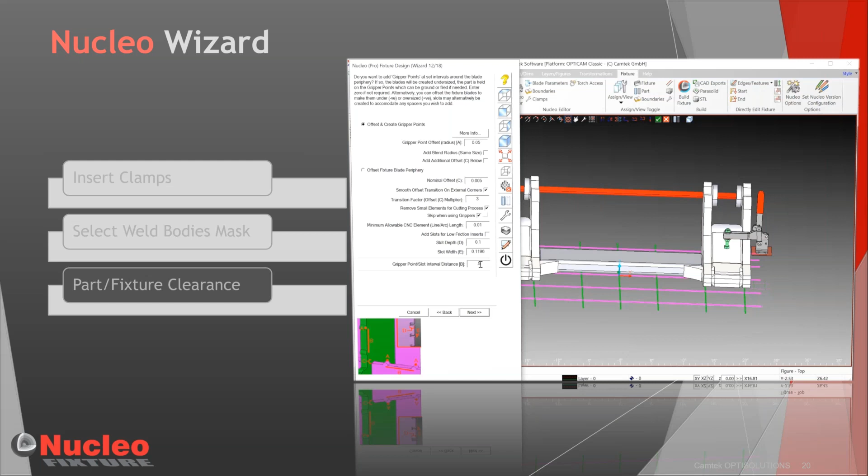On this page, we can set the weight reduction, so ventilation access. It also makes the fixture skeletal, and it can also make the base plate skeletal, so you have access with your robot.

On this page, we define our base plate hole pattern, which will match your robot table or trunnion.

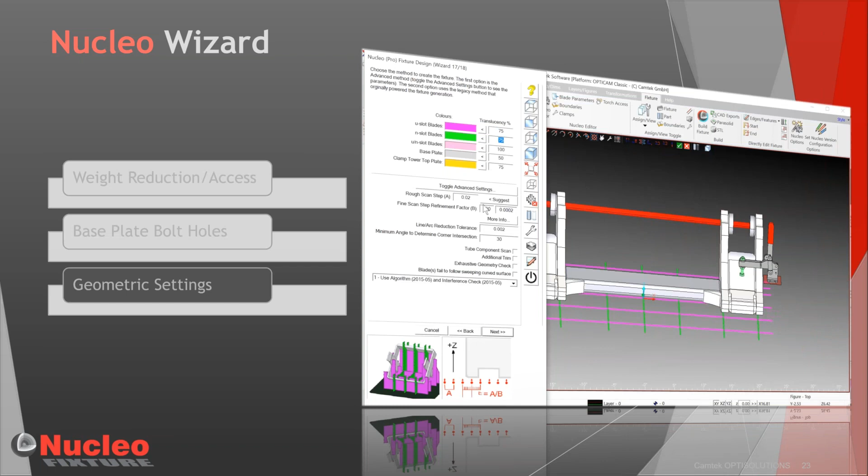We confirm the geometric colors and translucency. On this page, we set the font and where we want to put the annotation, so it will etch or cut through the part number on each blade, so you know which one goes where.

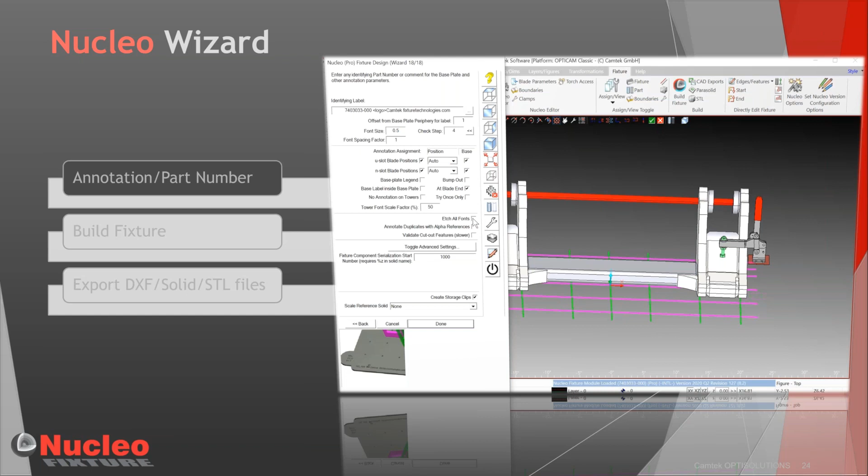And then we finally build the fixture. We condense this for time, it may take a minute. In reality, it's going through and making it skeletal, in my case. And you've got the completed fixture.

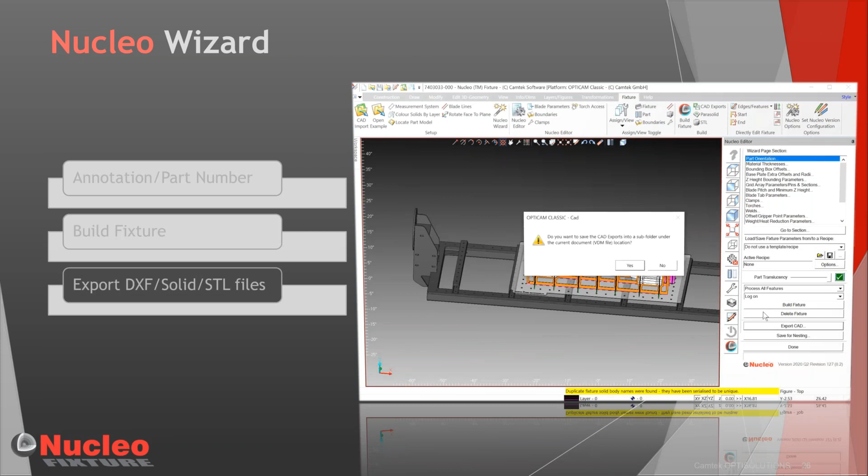If it all looks good, we can export the CAD model as DXFs, IGES, or STL files that are 3D printed files you can look at on the shop floor on a PC that doesn't have a CAD system. You can just look at them on the shop floor easily, along with a bill of materials and other information useful for the guy putting the part together. As you can see, some of these blades are orange because I marked them as weld bodies.

Here's a completed view of the fixture with some of the part pieces hidden, and you can see the gripper points, which are little bumps on the edge of the blade.

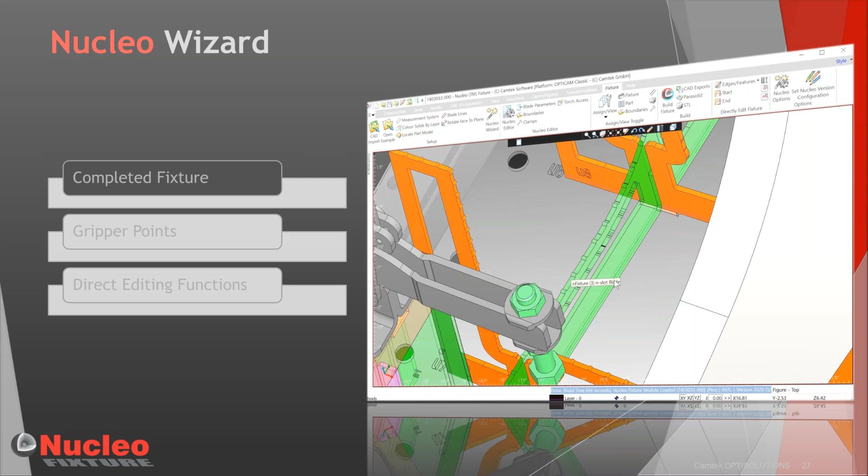We can perform direct editing functions on it, so we can just lay it down as a sketch. We can remove features or add features, maybe put a slot in there so we can get a pry bar in to get the part out. Anything you need to do here can be done.

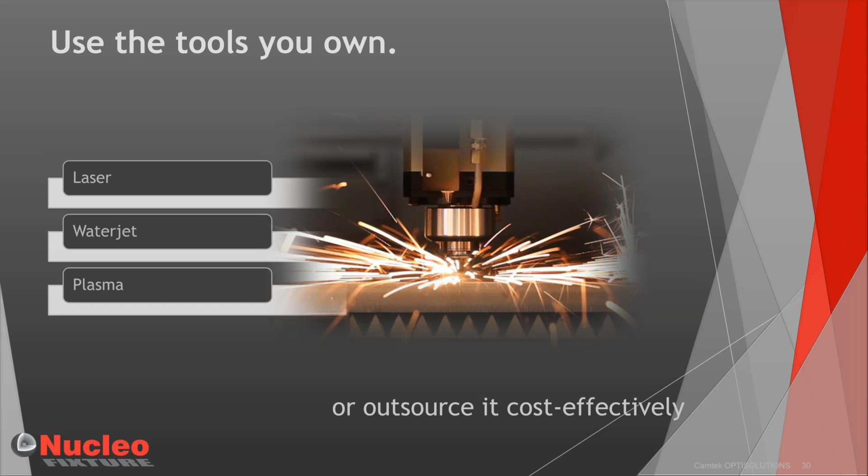This approach lets you rely on the tools you already own, or certainly have access to. You can cut the parts out on your laser, water jet, etc. You can produce fixtures to suit varying material thicknesses, any sheet material, any stock you have.

Does it work for everything? We have weld fixtures made for trailers down to 2-inch weldments. It's perfect for low to medium production without the need of extensive automation. OEMs such as E-Z-GO use Nucleo to make fixtures for prototype parts, so it's useful for prototyping too.

So basically it's fast and easy. A simple fixture takes 5 minutes, and training is generally under 2 hours.

So for robotic gains, of course, we're looking for repeatable results, fast setup and reuse, just-in-time manufacturing. Short-run, high-mix part weldments are easily catered for when we include Nucleo in the mix. And of course, when you pair it to offline programming, the gains are further enhanced.

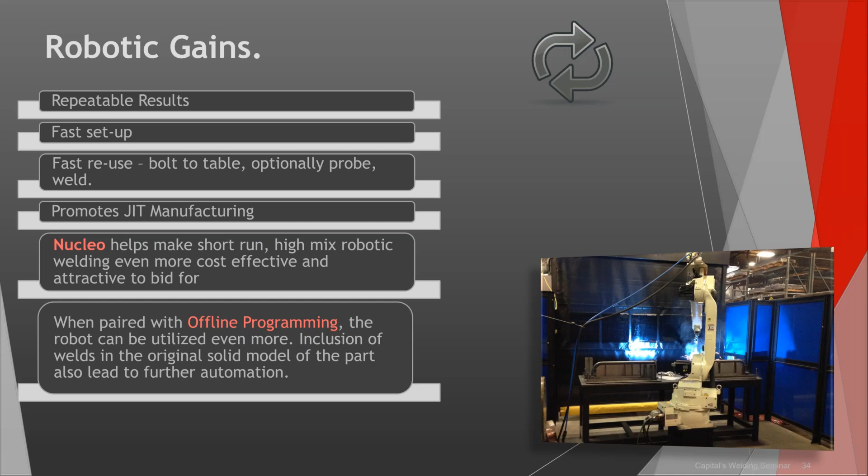When it comes to saving money, take the trailer ramp fixture: we had a quote for 8,000 for a traditional fixture, and we cut and designed it for 450 in Nucleo. We had a customer who did tractor components with a very similar part that took 40 hours the traditional way. He designed it in Nucleo in 2 hours.

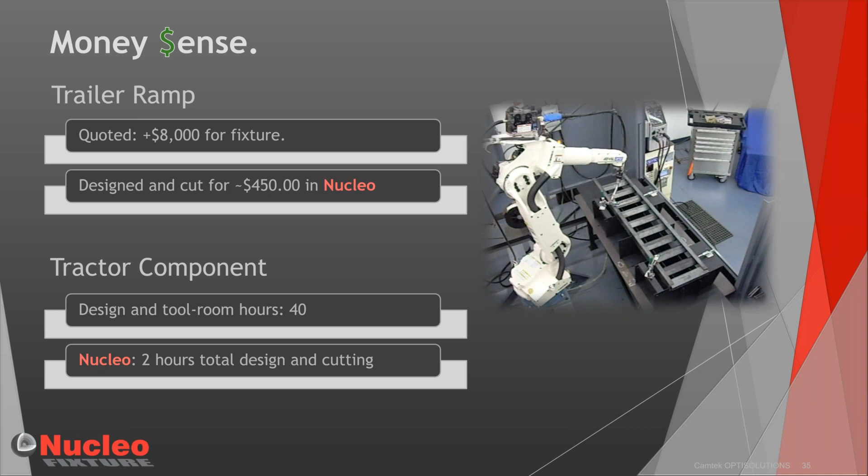On ROI, one customer tracked their ROI in the first quarter and saved 6,500 on some smaller fixtures and 3,000 on one fixture. So in the first year they should have saved tens of thousands on fixtures.

They were using it for manual welding, but of course it lends itself to robotics too. This customer only bought the software 2 months ago, and he told another potential customer he did 32 fixtures in 2 weeks, when prior to that a small fixture took him 2 weeks. They're a UTV, ATV manufacturer.

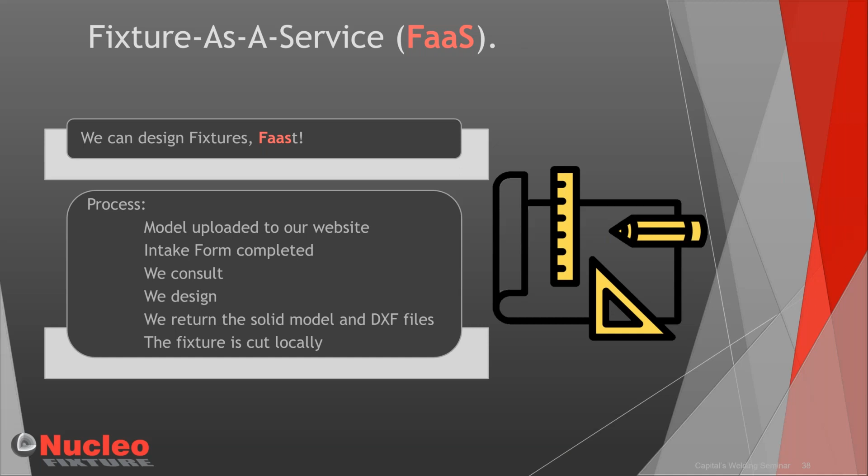We also offer fixture as a service for people who don't want to use or buy the software. You send us a model, we consult, have a meeting, then we model up a fixture and send it back for you to cut out. So that's really it on my side.